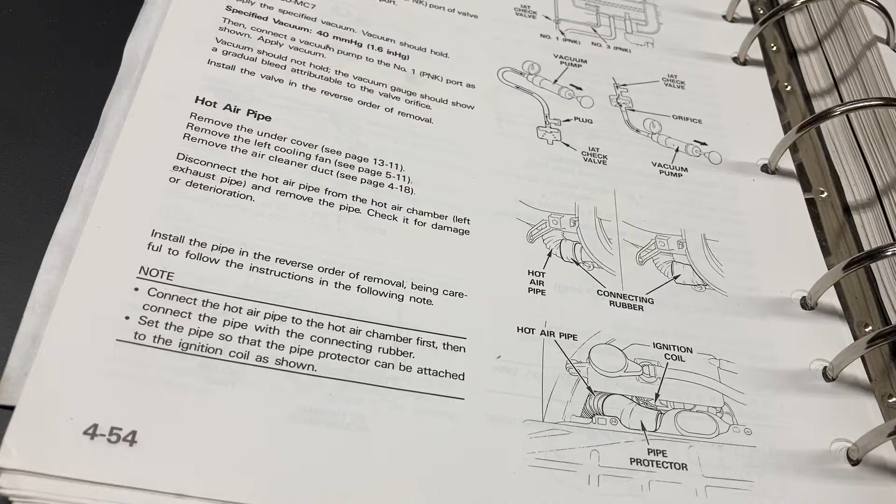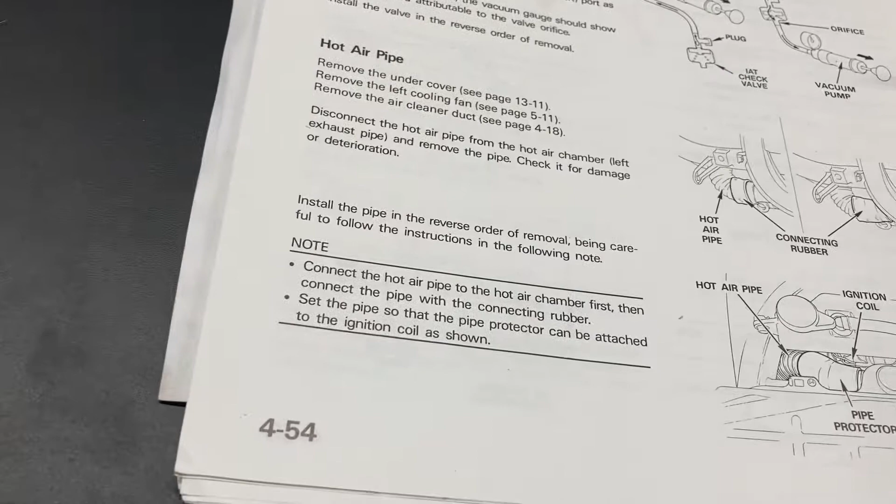Hey gang, this is Randy here, still on the GL1500 Goldwing. I don't recall how the hot air pipe, they call it,

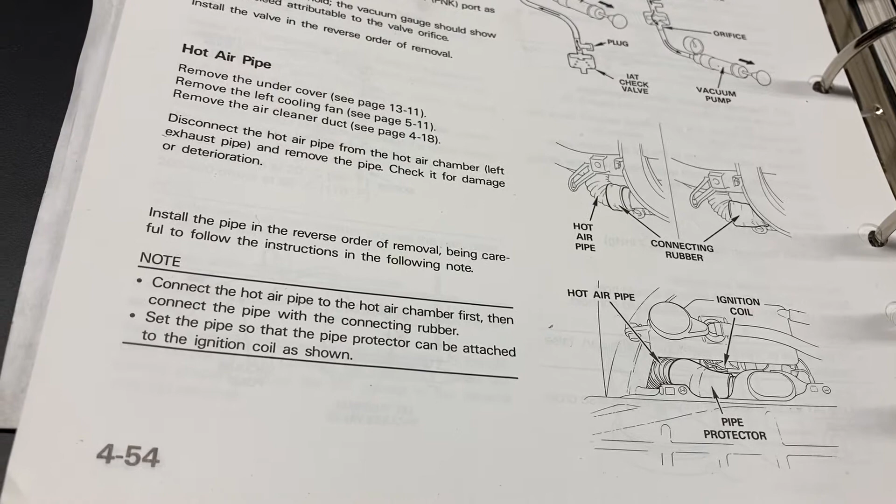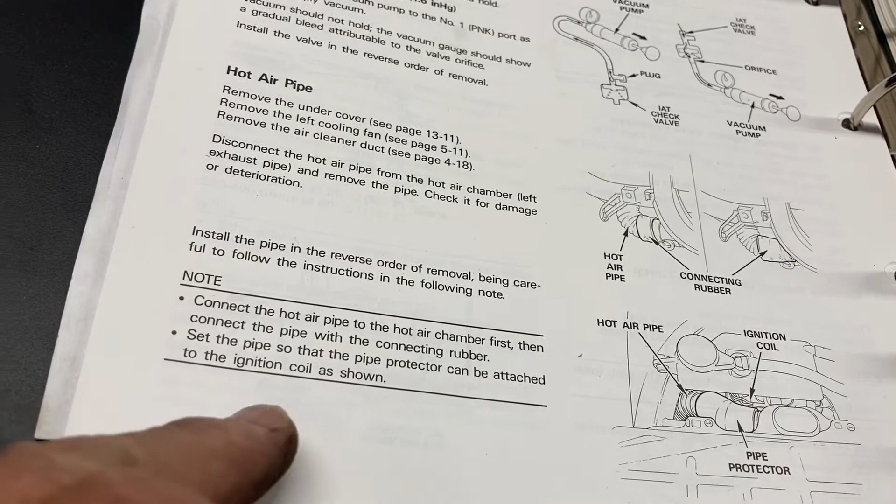was removed. It's been about a month and a half I've been working on this dang thing. Anyway, it says connect the hot air pipe to the hot air chamber first, then connect the pipe with the connecting rubber. Set the pipe so that the pipe protector can be attached to the ignition coil as shown. And so there it is.

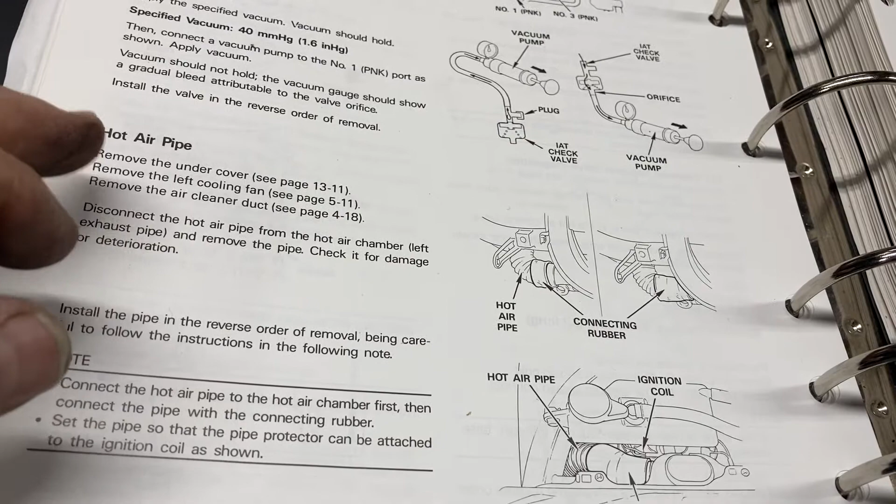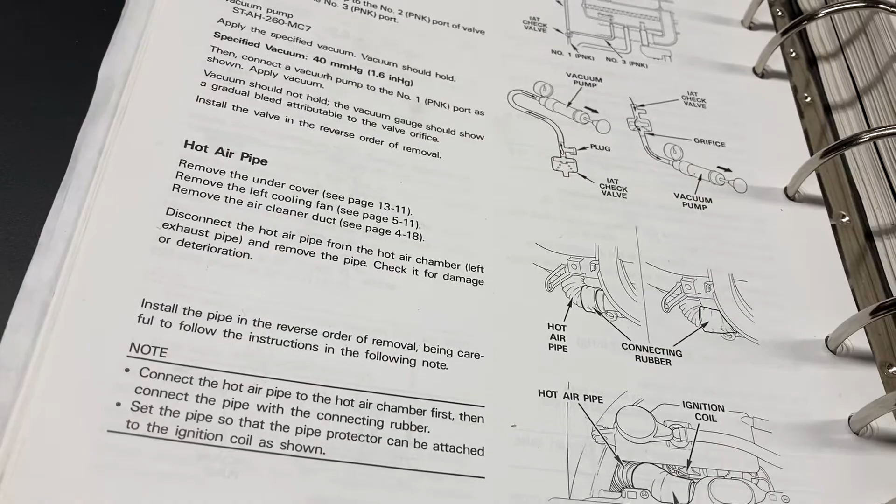Usually they say something about since you took it off, put it back on in reverse. I'll tell you what, apparently I didn't take enough pictures. I was counting on this service manual. So I'm taking things apart again. Doggone it. I'll probably get it done by the time snow flies.

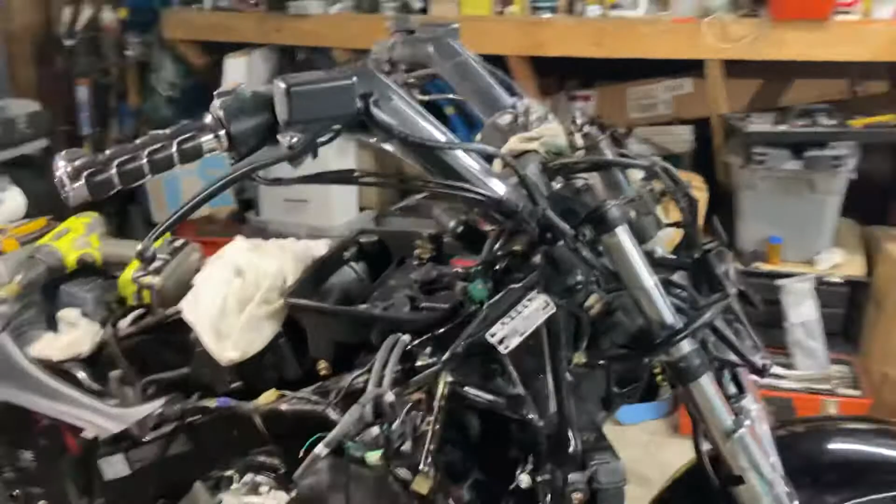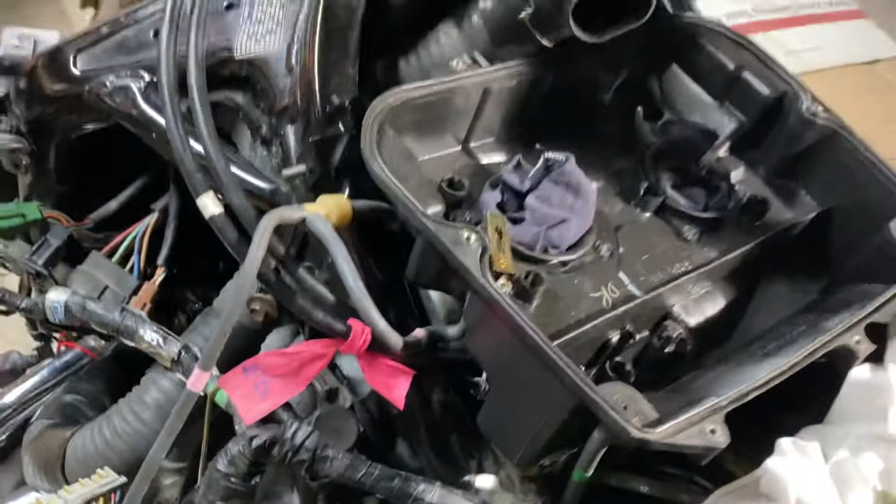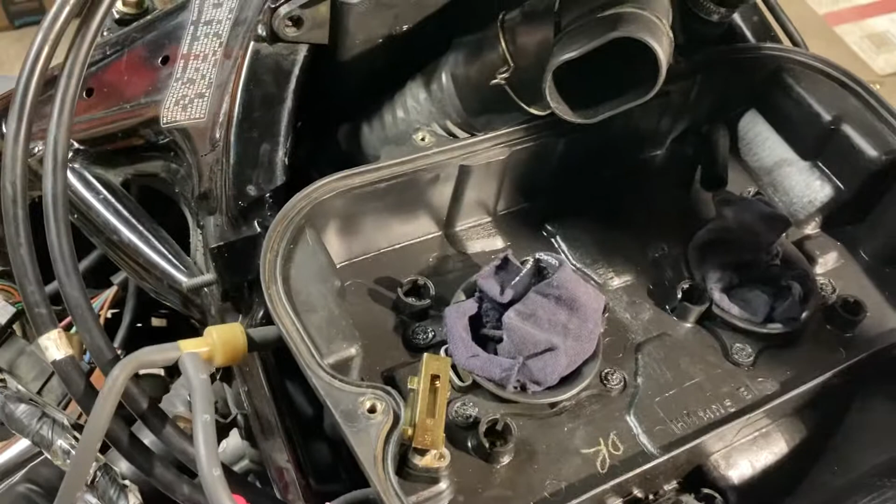But anyway, let me show you what I got going, what I found out. I took the air cleaner off. I managed to run the pipe up here. I've got extra pipe. I've looked on goldwingdocs.com. They don't have much to say about it. Sorry about that. Anyhow, this is what I've got going, what I figured out between the picture and this.

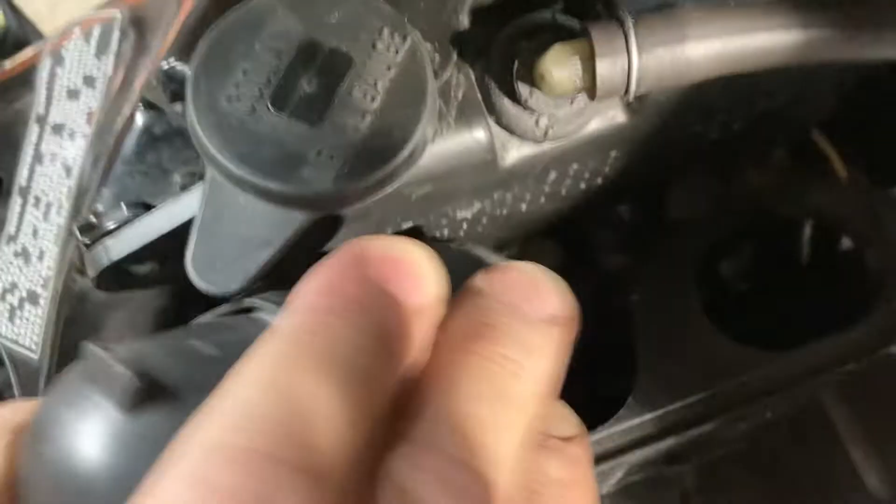Over here, there's a little opening, as you can see. I was thinking that it might come up that way, but it doesn't. It just runs along, and the coils. Let's see, I'm going to turn my light on. The coil is directly down there, two coils.

Okay, well, you run this pipe under here. This attachment fits up through there. And this gizmo, there it is, and that will set right on top. This connects to the air cleaner, and then it clamps down. Once again, this is a tight fit.

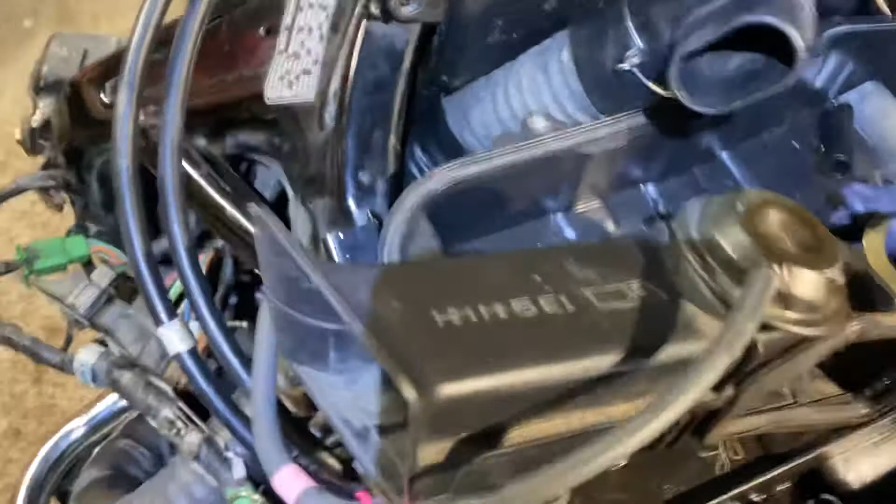I have something called chemo brain. My doctor says, well Randy, you might have, that's what happens with some people after they have chemotherapy, but you're old too. And well, he's right about both. So unfortunately, I've got the chemo brain, and I didn't write every bloody thing down as I was tearing it apart.

So anyway, it's a good thing. I've been an hour and a half again out here. It's a Sunday, and it's raining, and we needed the rain really badly. So that's a good thing.

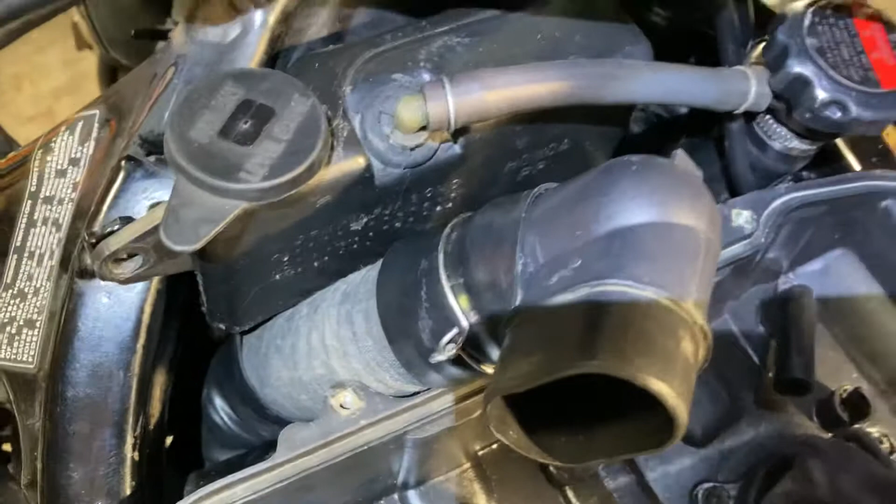I have a solution, and since there's basically nothing on the internet that shows this, and some poor guy or gal is going to run across this, I hope it helps you. I hope it helps somebody.

I have another one about the radiators, but I'll do it at another time. I want to keep this short.

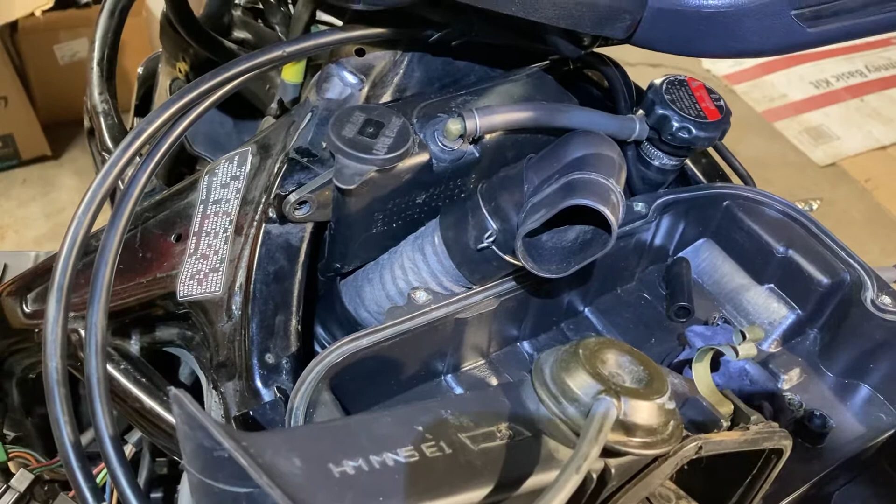Please wear your masks. Get your shots. I can't get my already replaced hip that's failed, it's failing, operated on, because the assholes that aren't wearing their masks aren't getting their shots, have clogged up the hospitals. So that's my rant. Take care, stay safe.

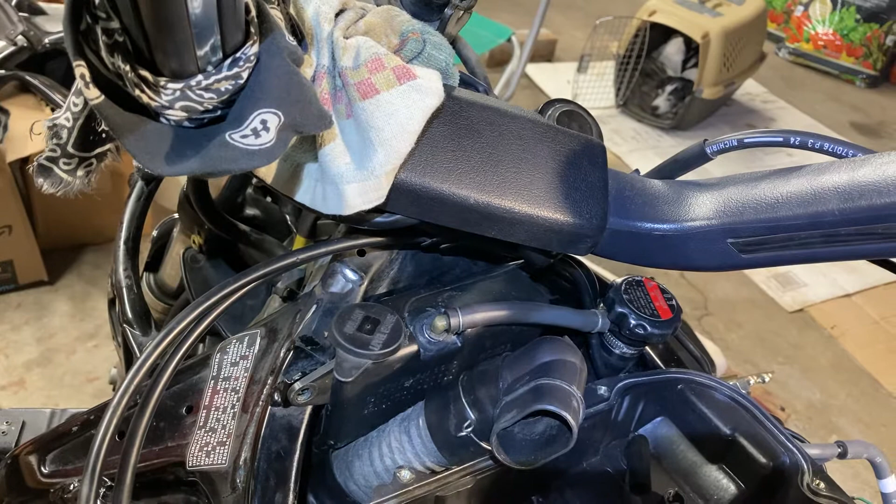Everybody has an opinion. Everybody has a right to get the shots or not. But you're doing a disservice to others, and in my opinion, our country. Apparently, China has 75% of their population done so far. Think about that one. Take care, stay safe, sunny side up.